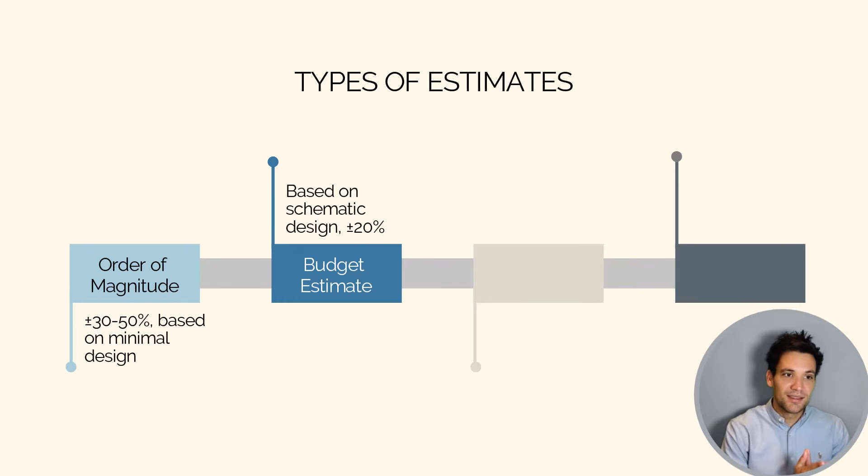So what about the different types of estimates? So basically, we can group estimates based on how accurate they are. We've got rough order of magnitude estimates, which would be like plus or minus 30 to 50%, based on minimal design and concept. Got budget estimates, so these would be on schematic or early design drawings, which would give you plus or minus 20% to the actual price. Got detailed estimates, so these are based on full construction drawings, which will give you plus or minus 10%. And then finally, we've got definitive or tender estimates. This is when we're actually quoting to complete a project. We're putting money on the line, and we need to know exactly how much something will cost.

So we've established what estimating is, when it's used, and who needs estimates. Now let's talk about why estimating matters specifically. Why is estimating a skill that can make or break a business? So I want to start by talking about some unfortunate realities of the construction industry. Now, whether you say these are unfortunate or not depends on your perspective, but the reality is these factors make it harder for contractors to make money.

The first one is the construction industry is a relatively commoditized industry. That means clients choose contractors based on price rather than other characteristics. You look at a non-commoditized industry, maybe something like a clothing brand, like you would choose a shirt based on the fact that you like a brand. You're not looking exclusively at the cost.

Construction industry, though, is a highly commoditized industry. Clients will choose a contractor based on the price they're submitting. What this does is it drives down profit margins for contractors because they need to sharpen their pencil, lower their cost to give themselves the best chance of winning the work.

Second factor is the amount of risk there is in projects. So over 30% of business insolvencies occur in the construction industry. That's going to be a factor of the fact that it's commoditized as well. But also, there's just a huge amount of risk in projects. They're technically complicated. There's a lot of uncertainty. There's a lot of unknowns.

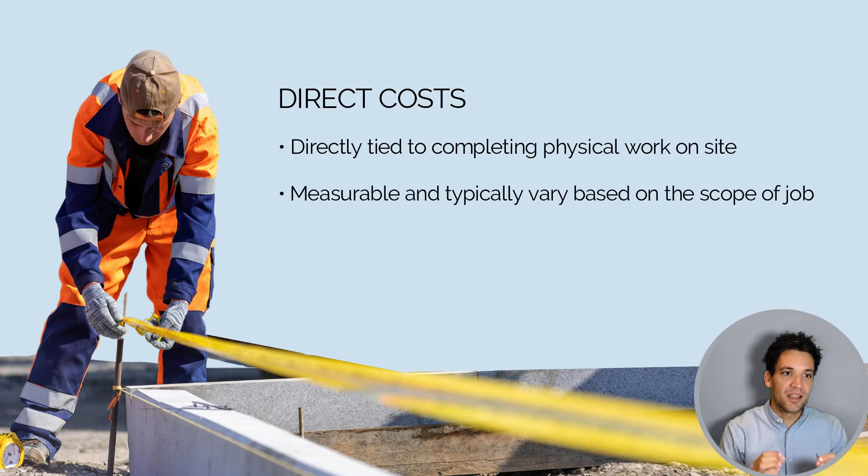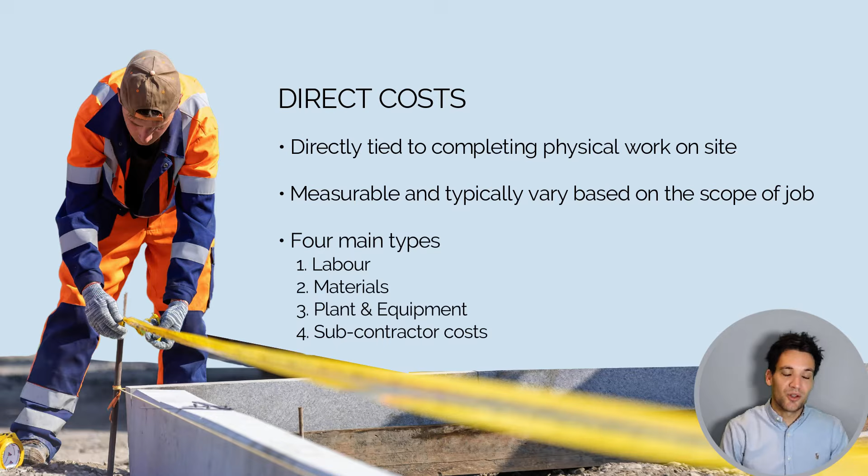Okay, so our direct costs are directly tied to completing the physical works on site. So these are costs we incur to complete what's shown on the drawings and specifications: pouring concrete, excavating, installing electrical cables, procuring plant that we need for the project. These are all direct costs. They're measurable and vary based on the scope of the project. For example, if we need bigger concrete foundations, we'll incur more costs to build these. There's four main types of direct costs. We've got labor, materials, plant and equipment, and subcontract costs.

The first type of direct costs are labor costs. So labor costs include wages, allowances, on costs such as super or workers' compensation that are paid to the people completing the physical works on site. These are always going to be a function of the labor rate we have and the labor productivity. So for example, how many meters squared per day of formwork can a formworker install? How many tons of steel can a steel fixer install? These productivity rates will drive the total project cost.

Labor costs are going to vary depending on the skill level or type of labor we need. So for example, do we need an electrician or do we need an unskilled laborer? The work type they're doing and the project location. The next bucket of direct costs we've got are our material costs.

So these are the raw inputs to delivering the project: the concrete, the reinforcement, the electrical cables. Maybe we have to buy air conditioning units if we're building a building. These are our material costs, and included in these, we need to allow for the actual supply of the materials, the freight to site and delivery, and any wastage impacting this.

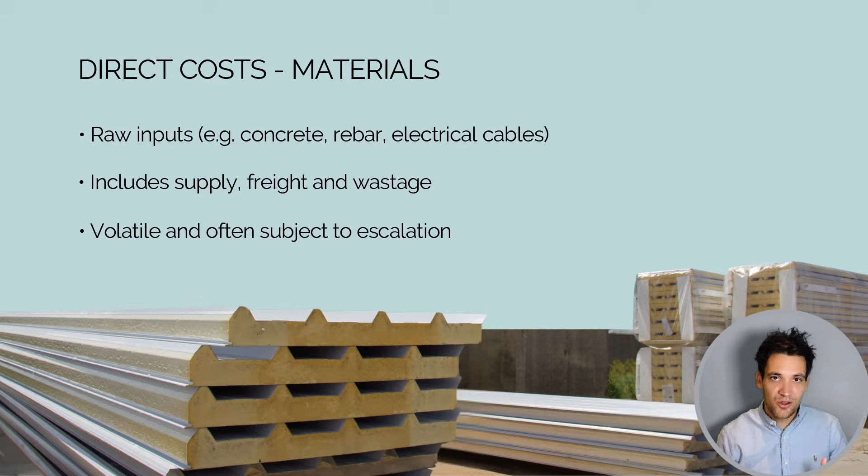These prices are often going to be the most volatile and subject to escalation. So for example, if copper prices go up significantly, then the cost of buying electrical cables is going to also increase. Then we've got our plant and equipment costs. So we've got hired or owned equipment needed for construction. So for example, cranes, excavators, concrete pumps, tooling, specialist equipment like that.

Within these costs, we need to include the mobilization and demobilization costs. So for example, getting the piece of equipment to and from site, any fuel, servicing, and operating costs, but they will typically be included under labor costs unless we have some sort of wet hire supply agreement. These will need to align with the productivity assumptions we're using for the labor as well.

So for example, we have an excavator operator and an excavator. We'll typically combine these rates together to get our built up excavation rate based on the expected productivity per day. But again, I'm going to cover all this when we go through how to actually build up our direct costs. For now, we're just talking about understanding these different types of costs.

The final type of costs we've got are our subcontracted costs. So these are quoted prices for packages of work, such as electrical, plumbing, formwork. If we package up a section of work, we get a lump sum price from a subcontractor to complete all the electrical work on our project. Typically, we'll get lump sum pricing, but it's also good practice to understand and validate the cost build-up the subcontractor has given us in case they've made some big mistake or error in how they're doing it.

We could get more complex in our contractual relationships with how we engage the subcontractors. We could do certain risk sharing agreements with them, or they could have certain exclusions that we'll need to account for. So subcontractor costs, not as simple as just letting and forgetting. We really need to understand their cost build up and how they price the work and what they're excluding and including. So those are our direct costs, the cost of completing the physical construction works.

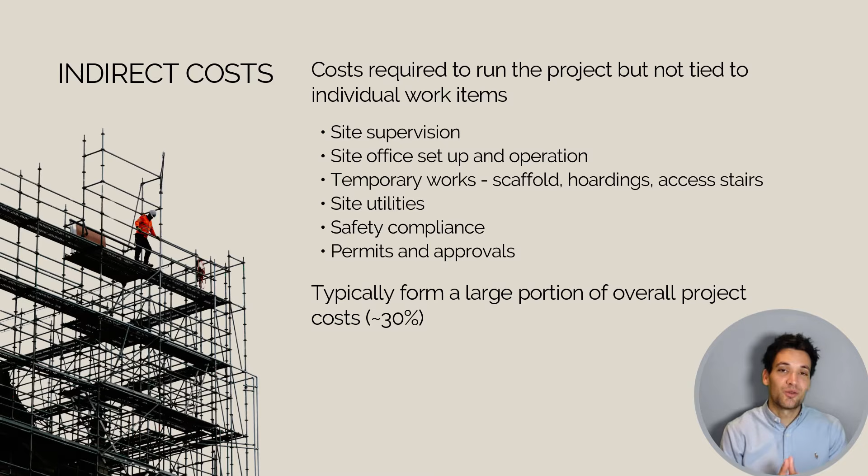So these are big costs like site supervision, site office setup and operation, temporary works, so if we need to put in a temporary access road, site utilities, so getting power, water, gas to site as required, safety compliance, permits and approvals, and they typically form a very large portion of the overall project cost. Maybe around 30% would be a standard industry figure, but it will vary a lot based on the specific type of the project.

So recurring costs are ongoing costs incurred throughout the project lifecycle, such as staff salaries. And the key point here is they're driven by the overall duration of the project, which means to accurately calculate them, we need a schedule. The other type are the one-off costs. So these are incurred at a single point in time during the lifecycle of the project, such as mobilizing to site or maybe freight costs.

To get our total project cost, we sum our direct costs and our indirect costs. Now, the total project cost is what it would cost us to complete the project based on our assumptions and understanding of the scope. So that's what we would need to spend to deliver the project. Okay, so total project cost is an estimate, and it's missing an important number of elements. The first one is contingency and risk.

So these are used to cover unknowns and uncertainties, certain events and conditions. We don't know how much it's going to rain. We don't know exactly what the ground conditions are like. Maybe the design is only a concept design. There's going to be further design revisions, which might cause us to incur additional costs.

All these factors will contribute to the amount of uncertainty in the project. The more uncertainty, the more contingency we need to allow. The less uncertainty, the less contingency we need to allow. Ideally, we'd have some sort of risk register with estimated dollar values against all of these.

But the other way to do it is simply have a percentage markup on the total project cost. Now, so far, we haven't actually applied any profit margin to our project. So if we submitted the price we'd prepared to the client, we'd be doing the job free. We need to apply some sort of profit margin or markup to the cost to ensure that it's worth doing the project. That's our profit margin.

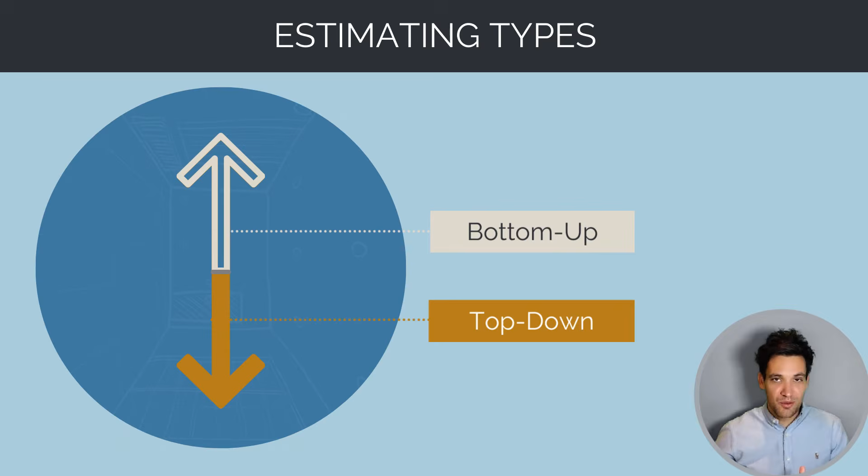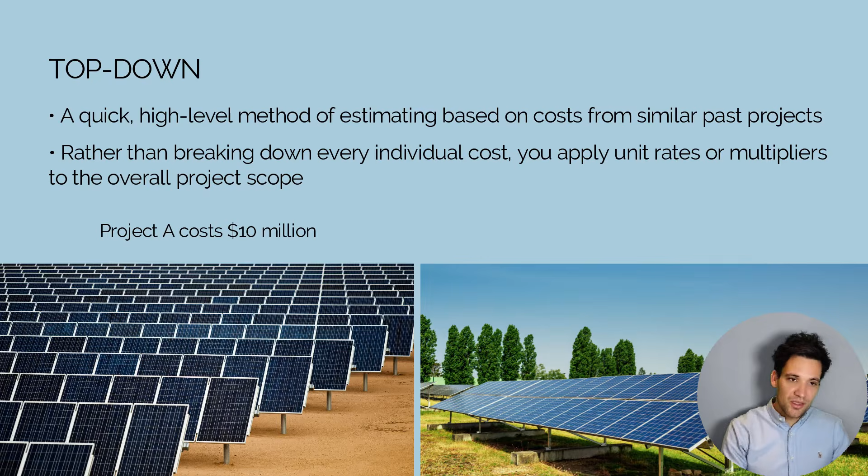Pretty obvious. The top-down approach is a quick, high-level method of estimating based on costs from similar past projects or even past estimates you prepared that you're very confident in. Rather than breaking down the project into every single activity and calculating costs associated with it, we simply apply unit rates or multipliers to the overall project scope. For example, if project A costs $10 million and project B is 50% smaller, we assume that project B will cost $5 million, subject to any adjustments to the scope.

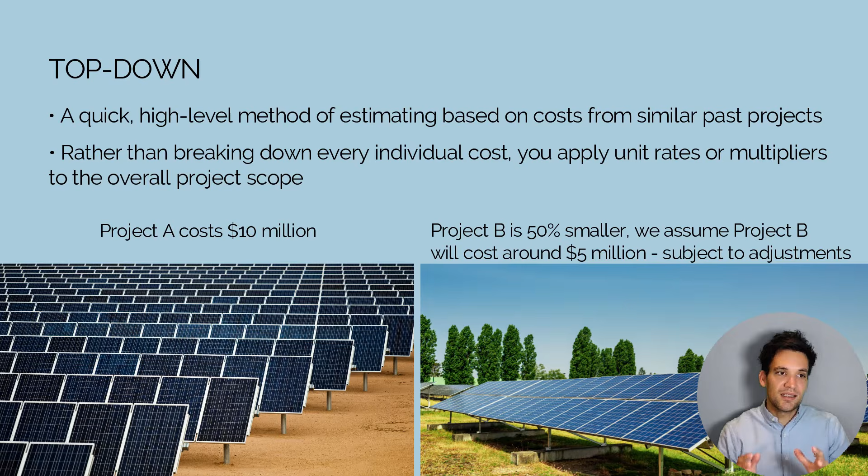So remember back to the types of estimating, when we spoke about the percentage range of accuracy with these. The top-down approach is what we would use when we've got higher variability in the accuracy, and getting a finalized price isn't particularly important. So we use it with early feasibility studies, early stage client discussions, rough order of magnitude pricing, when the design isn't finalized, and when you're scoping out whether to pursue a project or not. Basically, use it whenever there's not money on the line and you're not signing a contract to commit to a price. The top-down approach is good when you want fast and easy pricing, for high-level decision-making.

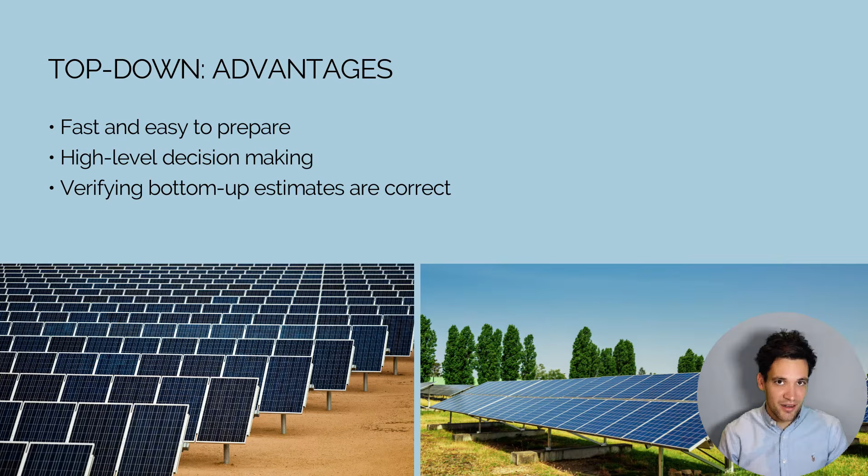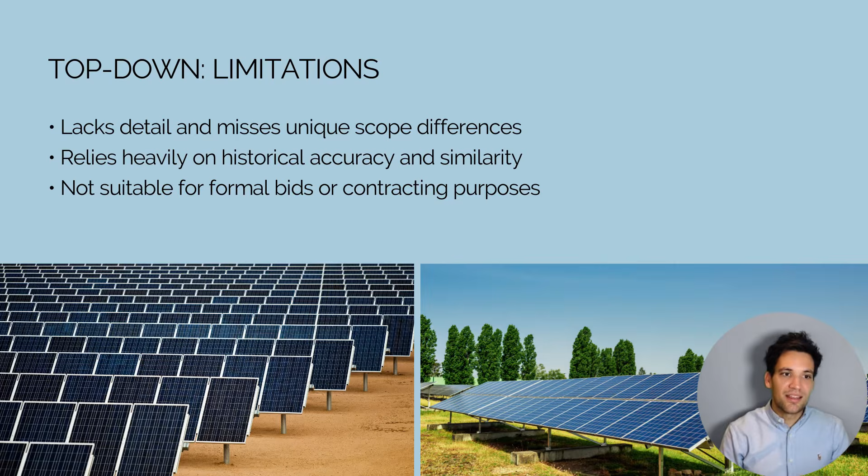It's also a really good way to verify a bottom-up estimate. So a good way to check a bottom-up estimate is to first prepare the top-down estimate, so you know roughly how much the total project should cost. When you're doing a detailed estimate, the two should align. So the limitations of a top-down estimate are they lack detail and miss unique scope differences. They rely heavily on historical accuracy and similarity, and they're not suitable for formal bids or signing contracts.

Bottom-up estimating, on the other hand, is where instead of taking the estimate from the top down, you build the estimate from the bottom up. So this is where you build the project costs by individually breaking the project scope down into component pieces, and against each piece calculating the cost of doing that scope. The process would be: you create a work breakdown structure of the overall project, you price all of the individual activities, you sum the direct costs together, you estimate the indirect costs, and you'll need to prepare a proper project schedule to do this, and then apply profit and overheads.

You should use the bottom-up approach when you're preparing detailed tender submissions, you're using detailed cost planning, you're preparing pricing to sign a contract, and basically anytime you need accuracy, traceability, and defensibility. If you're putting money on the line, if you're preparing to sign a contract, you need to do a bottom-up estimate. So the advantage of a bottom-up estimate is you get a high level of accuracy and control. You get transparent and traceable pricing. It allows better analysis and change management, and it supports confidence in your pricing. The limitations of a bottom-up estimate are that it's time-consuming and resource-intensive to do properly. It requires detailed design and scope clarity.

You actually need detailed drawings and specifications to prepare it, and it demands more skill and expertise. And I'll add to that final point that it's easier to make mistakes in a bottom-up estimate than in a top-down estimate. It's very easy to misscope, use the wrong rates, misquantify things. It's much more error-prone and needs to be checked more thoroughly.

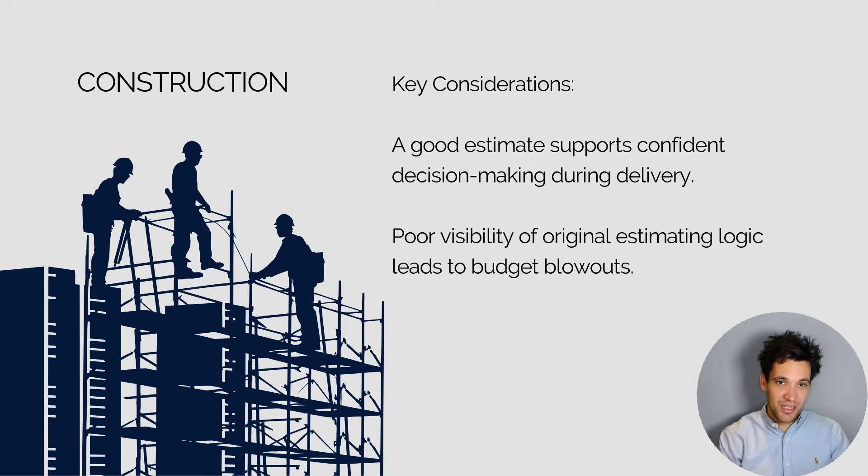Okay, finally, during the closeout phase of the project, we use estimating to compare our actual performance to our estimated performance and refine future estimating accuracy. So we're not necessarily using estimating to improve the performance of the current project we're on. We're going to use estimating to improve the performance of our business processes going forward. How's estimating used in this phase of the project?

We're going to conduct cost reconciliation exercises. So looking at our estimated cost versus our actual cost to understand what the difference is. We want to identify the key differences and the root causes. Did we have poor productivity assumptions? Did we have scope creep? Did we actually do additional work that we didn't get paid for? Or did we miss tasks when we were preparing our estimates originally?

This feedback is going to help build our historical cost database for our project, our productivity benchmarks, and our risk and pricing assumptions going forward. This whole purpose is to help us improve future tenders, understand how we can price more strategically, but also help us to improve construction going forward.

So the key consideration here is a robust closeout review can improve your tendering going forward because you actually better understand how much things cost, where you're making mistakes, where you're missing things, and how to improve this so you can be leaner and sharper with your pricing, but have a better understanding of the project risk.

Okay, so now we've spoken about how estimating is used in the different phases of project delivery. Now we're going to do a deep dive into top-down or budget estimating. This is where we prepare our rough order of magnitude prices using comparison data from other projects. Okay, so what's the process for preparing an order of magnitude or a top-down estimate?

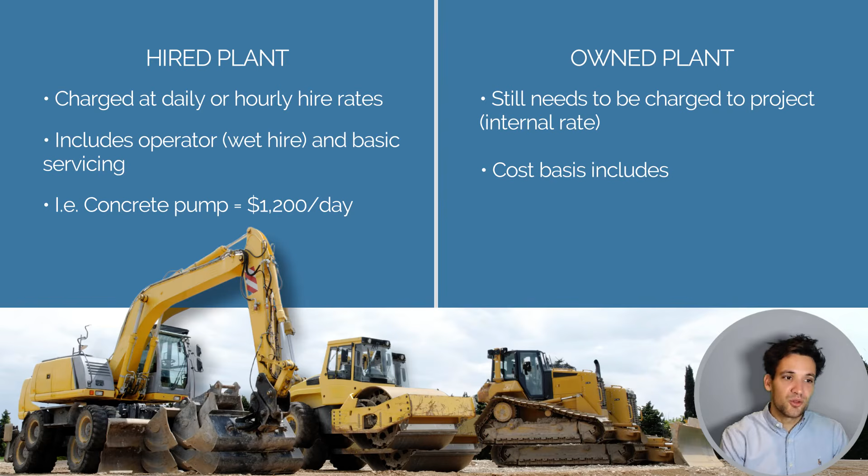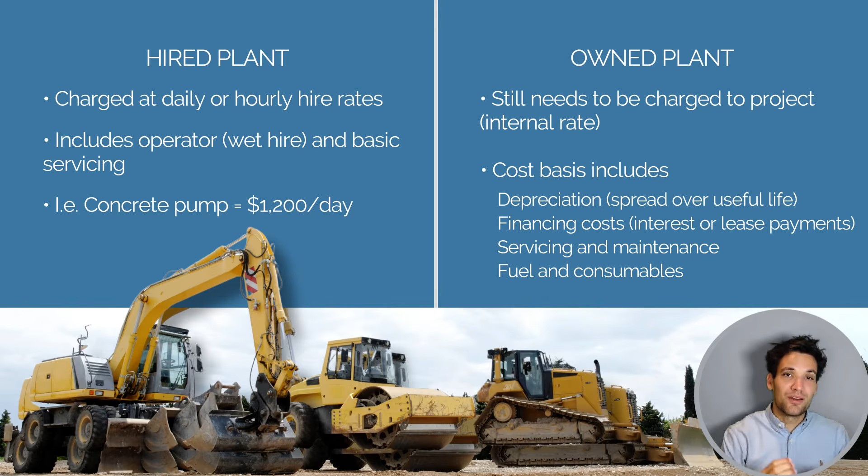With owned plant, we still need to charge plant to the project we're working on, or the business won't recover the cost of owning plant. The costs of owned plant include depreciation, so the original capital investment minus the final sale price spread over the lifetime of the asset, any financing, so interest or lease payment costs we're incurring, servicing and maintenance on the plant, and fuel and consumables. So owned plant rates are a bit more complicated to calculate.

Some key considerations with plant costs are utilization rates, so not factoring in idle time for plant. The easiest way to do that is simply use the same productivity and hours for your labor for your plant. So for example, if you're trenching 50 meters per day, that excavator that's being used for the trenching is allocated for the full shift to the trenching activity, even if it's only used half the time. Overestimating plant costs is also a problem when we're over allocating costs to the project, and missing mobilization and demobilization costs, which depending on where your project is, are often significant.

Okay, the next bucket of costs are our subcontractor costs. So these are costs we pay to external subcontractors and suppliers. This can be on a lump sum basis where we get a full quote to deliver a package of works as per the drawings, or it can be on unit rate costs. For example, we get a rate per linear meter of saw cutting. Typical subcontractors that might be used on a project could be electrical, plumbing, structural steel, roofing. Within the subcontractor's lump sum price, they'll provide all labor, plant, materials in their fixed cost.

Okay, so how do we handle subcontractor costs? Well, the first thing is we need to develop a detailed scope of works with clear inclusions and exclusions, and then with verified quantities. It's always better, particularly when you're tendering work and you're not necessarily in a position where you're ready to sign a contract with your subcontractor, to do your own quantity takeoffs of their work so you understand everything and you ensure that they don't just give you some quick, dirty price and a mistake. So perform your own quantity takeoffs of the subcontractor's work.

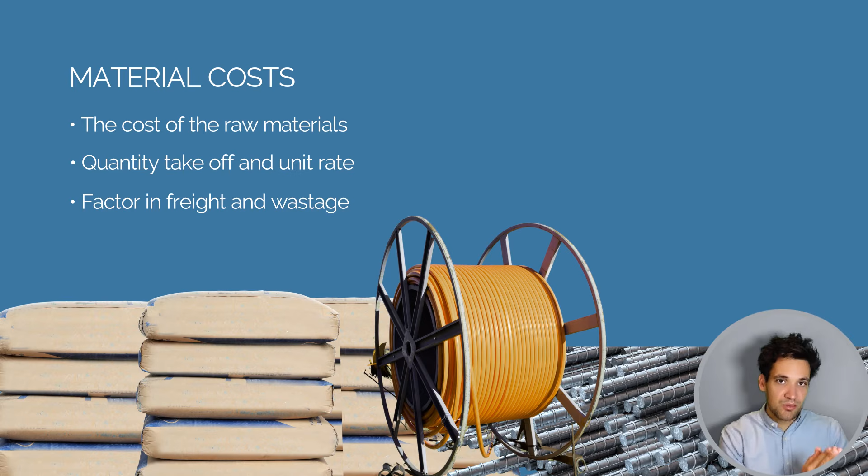Okay, so where are we at? Our direct costs, the cost of completing the physical construction works. For each activity, we need to calculate the labor costs associated with it, the plant and equipment costs, the materials, and the subcontract costs. We sum those together, we get the direct costs for a specific construction activity.

As an example, let's do a direct cost estimate of building a concrete slab. Now, all we're going to be doing is supplying and installing the concrete, the reinforcement, the formwork. We're not going to worry about excavation or any preparation work such as survey set out. The scope of the project is to construct a 100 meters squared, 150 mil thick concrete slab.

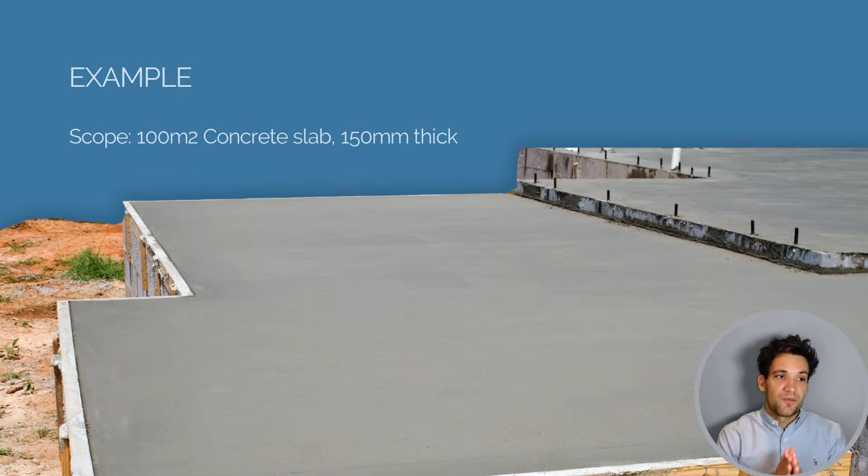So first thing we need to do is get our key quantities by doing our quantity takeoff. Our concrete volume is 100 meters squared by 150 mil thick. We need 15 meters cubed of concrete. Our formwork, which we need around the perimeter of the slab, is 40 linear meters by 0.15 meters deep, and we require 6 meters squared of formwork, and we need the reinforcement.

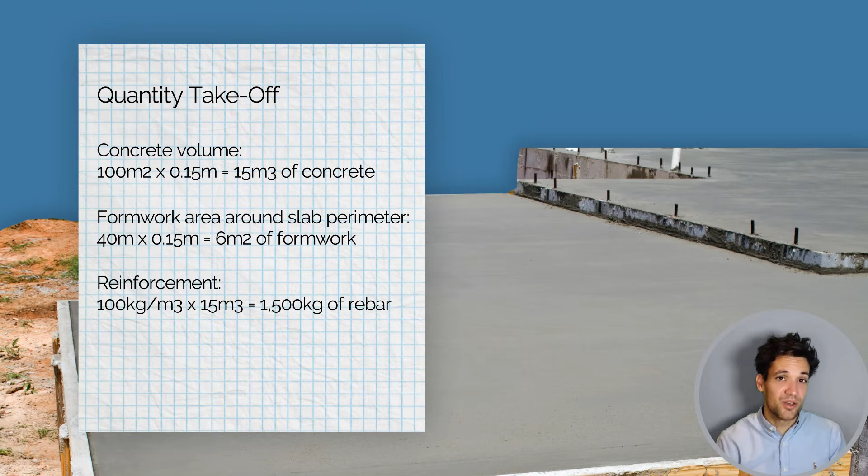We're going to use a ratio method to calculate this. So we're going to assume there's 100 kilograms per meter cubed of reinforcement. For the 15 meters cubed, that gives us 1,500 kilograms of reinforcement. So then for each of these tasks, we can take the quantity and the rate to calculate the cost.

For the concrete supply, we need 15 meters cubed of concrete. Our rate is $250 per meter cubed, which gives us $3,750 for the supply. For our reinforcement supply, we need 1,500 kilograms at $1.50 per kilogram, which gives us $2,250 for reinforcement supply.

For labor, we're assuming to install the formwork, to place the reinforcement, and then to pour the concrete, we need 3 workers for 8 hours to do the entire slab. Our cost rate, so our on-costed rate of the labor, is $60 per hour, which is $1,440 for labor. And we're going to need a concrete pump for 1 day at $1,200 a day. This gives us the total cost of performing the slab of $8,940.

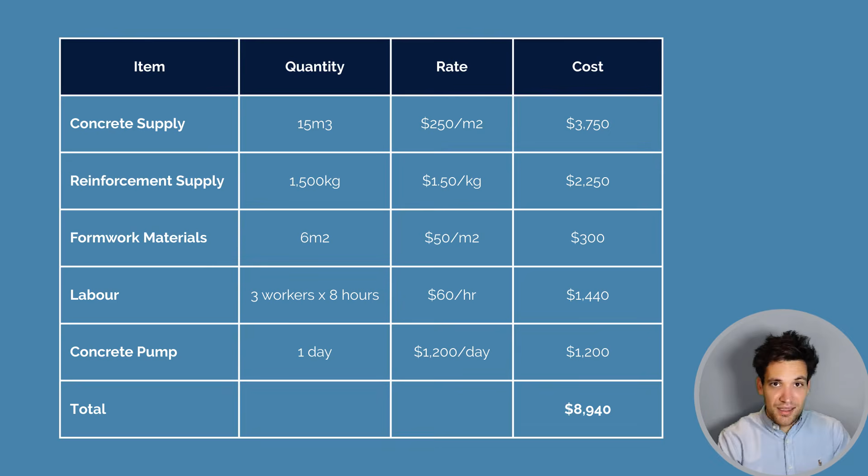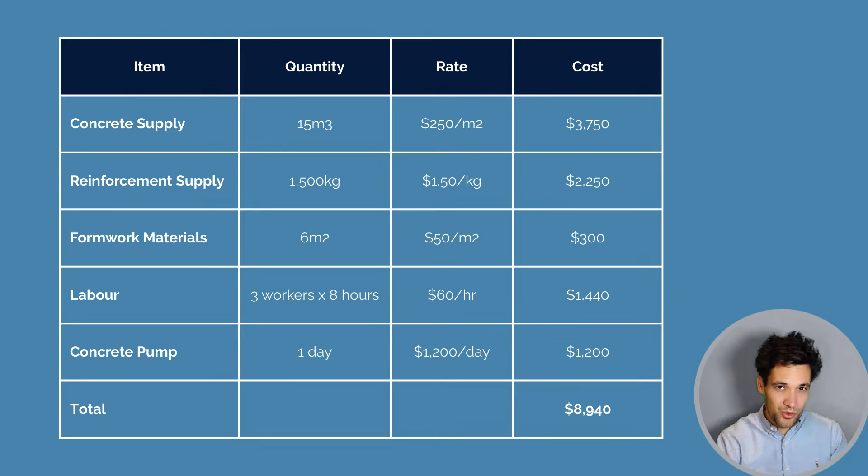Now, these numbers are just made up. They don't mean anything. If I look at those labor numbers, that looks very lean to construct that slab. You get the general point. You go through each of the items. We take the quantity and the rate to get the total. We sum those together. We get our total direct costs for constructing the concrete slab.

Okay, so let's go back to our estimate components and let's look at where we're up to. So we've done our direct costs. We've worked out the construction activities we need to deliver the project. We've worked out labor, material, plant, and subcontract costs. We've done this for every activity in our work breakdown structure. We sum all these together, we get our total project direct cost.

Now we need to move on to calculating our indirect costs. So indirect costs are the costs of supervising, managing, and facilitating the work. Now remember, our direct costs we can calculate by looking at the drawings, going through all the different drawings and working out everything that needs to be done to complete the project.

Indirect costs are a bit more challenging because we need to come up with the costs we, as the contractor, are going to incur to manage the work. It's not going to be shown on any drawings. We're not going to see the crib facilities, the toilets, whether we need a security guard at night. That's why the challenge with indirect costs is making sure we've covered everything.

So indirect costs are expenses necessary to run the project that cannot be directly linked to a specific construction activity or work package. They support the overall project delivery, covering site operations and compliance, but they're not going to be shown on any drawing. They're also referred to as preliminaries, prelims, or site overhead and running costs.

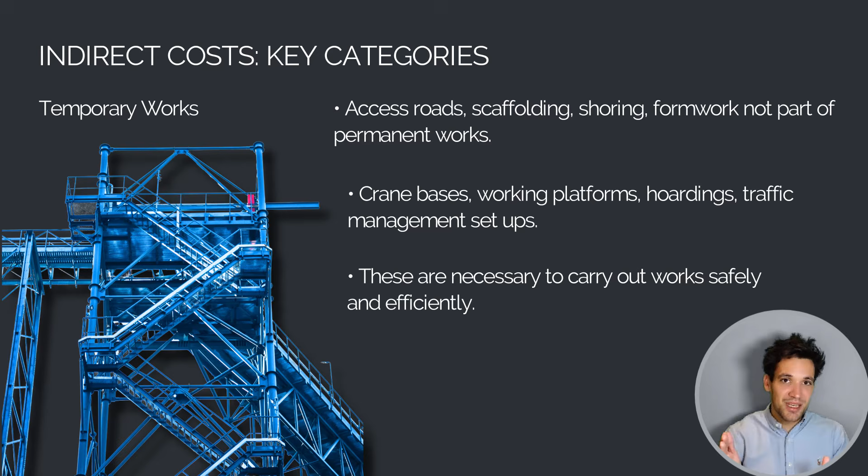Now, in a lot of situations, you would cover these within the direct costs of the task. For example, if you're doing a concrete structure and you need falsework and scaffolding for that, I would recommend including that in the direct costs, as it's associated with one specific task. However, if you're erecting a scaffold tower to get access to a roof where 3 or 4 different trades need to work, then that would be covered as a separate indirect cost because it's related to multiple different costs. The line is a little bit gray and blurry, and particularly around temporary works is where it's incredibly easy to miss things. So just make sure you've thought through the actual construction methodology and what temporary works need to be in place to facilitate the works.

And we've also got utilities and consumables. So these are things like power, water, fuel for generators, consumables like PPE, office supplies, cleaning materials, waste disposal, and environmental compliance. So waste disposal can be quite a significant cost on projects, the logistics of how you manage the bins, how much waste you produce, whether subcontractors are taking away their own waste. All these things need to be considered and covered in your indirect costs.

Next, we've got costs like permits, insurances, and compliance. So local council permits, road closures, environmental fees, project-specific insurances like contract works insurance, public liability, bank guarantees, retention, financing costs, and safety compliance. So training costs, audits, documentation, all sorts of costs that we need to comply with laws, regulations, and contract requirements.

Now, the next cost, which might be huge if you're working in a remote area of Australia, or might not really be that significant if you're working in the middle of the city, are mobilization and demobilization costs. So this is transportation of equipment and personnel to and from site, including the mobilization of plant, cranes, and heavy machinery, setup costs for subcontractors. All these sorts of things will need to be covered in your preliminary costs.

Okay, so broadly speaking, those are all the buckets of indirect costs you'll incur to deliver the project. They will be specific to the project you're working on, where you're working, the country you're working in, all these sorts of things. So how do you calculate these costs? The first step is you need to understand how long your project will take. Most of these costs will be driven by time, which means the longer the project is, the more these costs will accrue. The shorter, the cheaper. The project duration will drive the staffing, the site facility needs, the utility costs, all of these time-based costs.

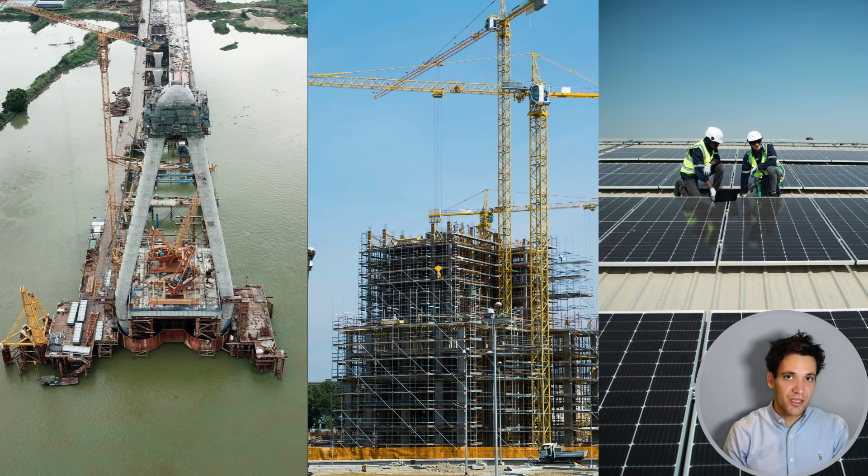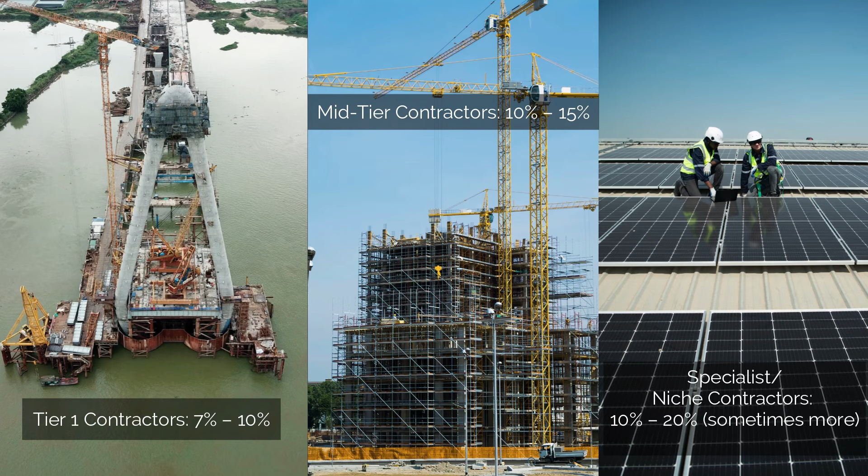Okay, so what are typical profit margins? Again, this is so location, project work, type of work dependent, but big contractors typically sit on a project margin of around 7 to 10%. So these numbers are profit and corporate overheads. Mid-tier contractors would be more like 10 to 15%, and specialty subcontractors would be getting around the 20% mark.

Again, so estimating is the scientific approach to calculating cost. Profit and overheads are business decisions. They need to be made by business managers, people who understand the competition, the market, and the business strategy. Great estimators need to understand both. They need to understand the scientific approach to calculating cost, the objective side of estimating. They also need to understand the subjective side, which is the business decisions that surround pricing projects.

Okay, so now we've determined our sell price, what we're proposing to charge the client for our work. The final thing we need to do is we need to review our estimate. We need to check it's correct, comprehensive, and we're not going to lose money on this job. Then we need to submit it to our client and come up with a format that we can provide them our quotation. So why is reviewing your estimate so important?

Well, for the simple reason that underquoting jobs sends construction businesses broke every single day. Warren Buffett had a famous saying, which was never lose money, and you should 100% apply that in your tendering approach. It's always better to have no work than to lose money on a project. People say you should buy projects. Doesn't make any sense to me. If you structure a business in such a way that you have incredibly low corporate overheads, then there is no pressure to secure work at a price that there's every chance you lose money.